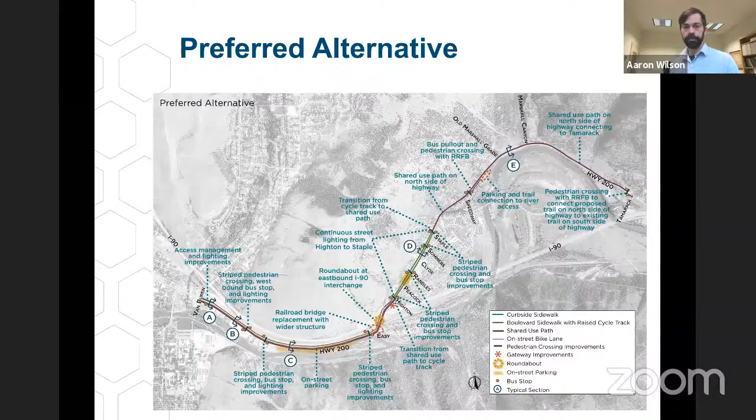So we'll start with the East Broadway section. This is an area that already has some existing facilities, including sidewalk and bike lanes. But we really looked at what would be the optimal transportation facilities through here.

There haven't really been any changes to this section since the last time we presented, other than we've added some additional detail on the typical sections to reflect the variable right-of-way width. One of the challenges through here is that the right-of-way can vary, I believe, between 60 and 80 or 100 feet, so we have typical sections that reflect those different right-of-way widths as you move through the corridor.

Other than that, this section has the shared use path as the primary transportation facility for bicycles and pedestrians. We had a lot of discussion at the last TTAC about the inclusion of bike lanes in addition to that shared use path, and that's really to accommodate those primary bike commuters who are coming from East Missoula and may want to just stay on bike lanes, which essentially matches the existing roadway.

The other piece through here that we talk about in the plan is the potential to have a riverfront shared use path. If that becomes a feasible option, we can come back and look at whether we have one along the river and one along the road, and do we prioritize one over the other. But ultimately, we want to have that protected facility on the south side of the road where the majority of the development is occurring.

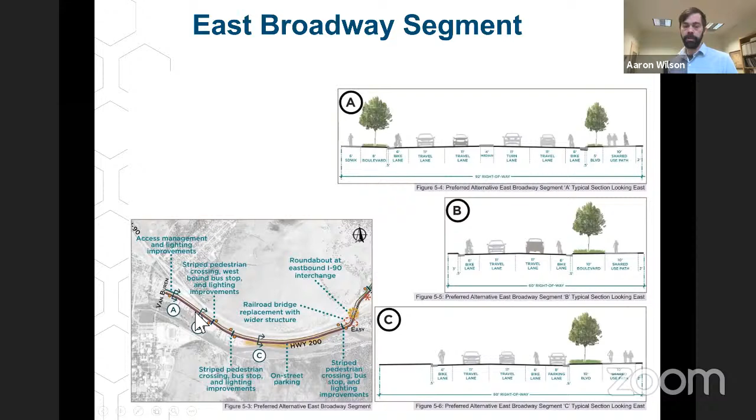The other piece of this is we're looking at the bus stop locations and getting some lighting at locations where we really need it on the corridor, particularly at those bus stops and at potential conflict points like the railroad underbridge and in the core, along from Van Buren through that developed portion of East Broadway.

The other part of this section we wanted to highlight is as it approaches Van Buren, some of the intersection improvements and really thinking about circulation with these commercial areas. As this redevelops, there's some opportunity to create additional access control for safety and improve the efficiency of travel flow through here. Stephen can answer any specific questions about this design, but really we're trying to think about access to these properties, how people are doing that, and making sure we're increasing safety and preventing some of the conflicts that might happen today.

With this particular portion of the project, we'll want to integrate that with any designs that come out of work at the Van Buren Broadway intersection. We'll want to tie in facilities and think about that full intersection traffic flow. But this is sort of the concept for how we could improve this section of the corridor.

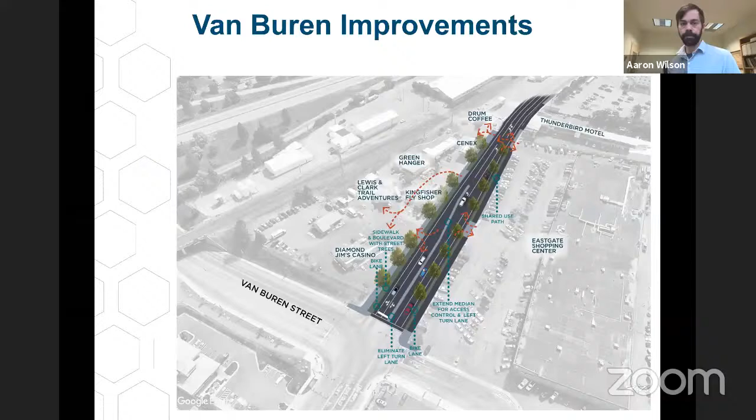Then at the east end of the East Broadway section, we have the railroad bridge. As we talked about, what we heard from just about everybody is that the preferred option is to replace that railroad bridge with something that allows more multimodal facilities through there—widening it to allow bike facilities, vehicle traffic, pedestrian access, and continuing that shared use path under the bridge. That's a really significant part of this corridor plan in terms of the cost and the challenges of getting it done.

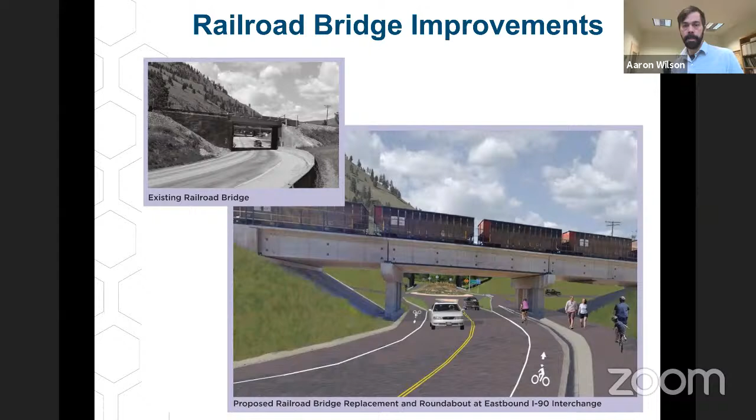So that moves us into the East Missoula segment. This is a much more urban typical section in the design. We haven't made a lot of changes to this design—the concept is still basically the same in terms of having protected cycle tracks and sidewalks.

So having a transition from the shared use path to protected bike lanes as you come into East Missoula, creating a more urban street that has a center turn lane, travel lanes, and where there's right of way and need, potentially adding on-street parking for some of those businesses that may lose their parking access as we develop this corridor. Some businesses are close enough that their parking bleeds into the right of way, so we want to make sure they don't lose that and that we have adequate parking along this section of the highway.

Proposing lighting throughout East Missoula. That's something we've heard over and over from East Missoula residents, that lighting is a real challenge here and creates a real safety problem.

Also proposing to relocate transit stops from Speedway onto Highway 200, with good crossing improvements located at those transit stops to help increase permeability across Highway 200 for pedestrians. There is increasing development on the northwest side of the highway.

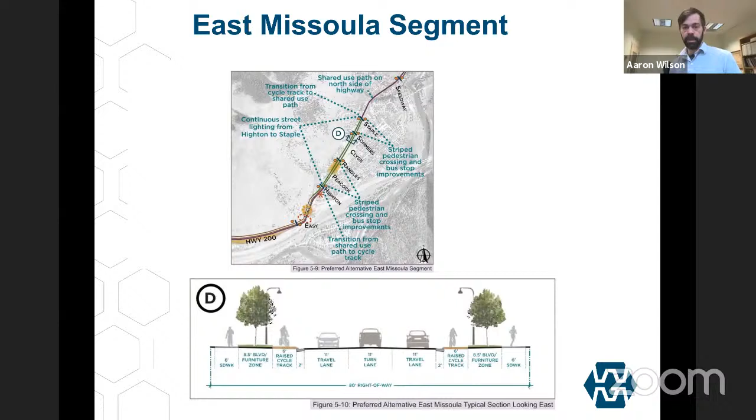So this is a rendering, or conceptual rendering, of what that would look like with the protected bike lane, sidewalk, and boulevard through the core of East Missoula.

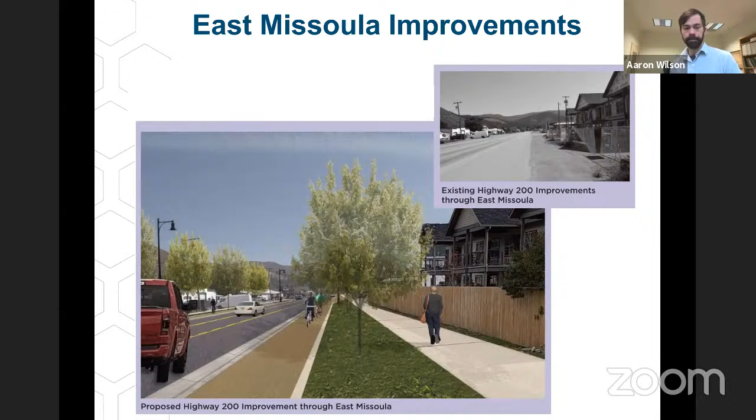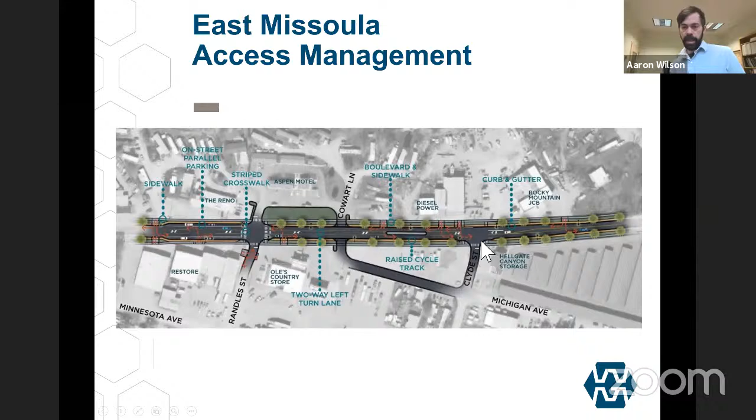The other part of this plan is thinking about access management. Currently it's basically a free-for-all through a lot of East Missoula. There's no curb and gutter, no defined entry into parking lots or streets. A big goal of this project is to better define that, create predictability of where vehicles are entering and exiting the highway, and define those parking lots.

Something we've worked on since the last presentation is how those side streets intersect with Highway 200. Currently they are skewed intersections, which we've heard from both residents and from a safety perspective creates issues. So this plan looked at a couple of different options.

One option is just squaring off those intersections as they hit Highway 200, but because of the angle they're hitting, that creates offset T-intersection geometry, which we think creates additional turning movement conflicts and safety issues. So that may not be the preferred way to do it.

A better approach we think is the right way to square those intersections off is, because of the limited right of way, to shift each roadway slightly east or west and then square it off so they line up. It's not exactly a perfect 90-degree intersection, but it's much closer, and it creates the turn radius and curb lines that will help slow traffic as they're making those turns and make them much more safe.

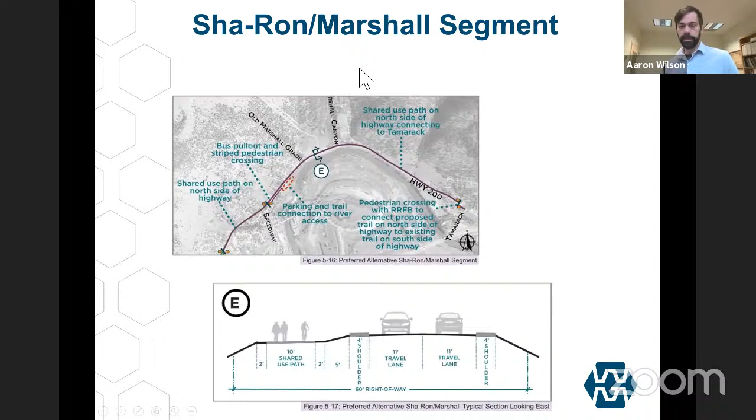So that's the quick overview of the plan. There's a lot more detail in the draft document and in all of the work that went into developing that preferred alternative. But the other piece we've added in this draft is thinking about funding and implementation. This plan gets us to a conceptual design for the corridor, but there are more steps to actually get this project constructed, including finding the funding.

I'll go through the different project elements and what they cost, but it's a substantial project to do this whole corridor from Van Buren to Tamarack. We need to do the engineering and survey and get this project really shovel ready so that when that funding is available, we're ready to go to construction.

So we do have some implementation recommendations and additional information on how we think that could proceed, including breaking this into discrete project elements, knowing that we may not be able to get all of the funding for the whole corridor in one go. So we can be creative in looking for funding for different segments and construct it over time.

So we have this table in the plan that breaks down each of those project elements, has planning level costs associated with it, what's included in that segment, if there are any feasibility constraints or issues, and then goals for what that section is going to provide in terms of improvements to the transportation system.

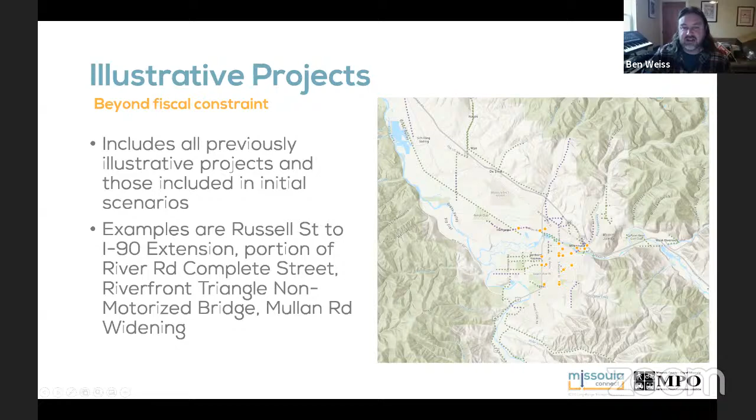I was coming to say the same thing, and I have some specific questions about some of the recommended projects that I'm not able to make much sense of, but maybe we can have those discussions at the next technical advisory committee meeting. I don't know that we need to take the time here, but I'll review the list and make some comments.

I think we'd ask all of you, as you continue to look at the list, to get any specific thoughts or questions on the recommended scenario or the illustrative scenario back to us, hopefully by a week and a half from today, maybe before the 17th. That would be helpful for the next steps conversations. Please reach out if you've got questions about what a project is or if the description doesn't make sense. We can provide more detail.

So Aaron, I've got several hands up. Are you through your presentation? Are you ready for questions, or do you want to continue on? We've got some more to present, but happy to take questions on where we're at right now. Okay, I've got Ellen and Dave Gray. Do you have questions about where we're at in the presentation? I already did mine, thank you.

My only concern with removing illustrative projects is that those went through a public process and were received well, and we can't necessarily just dismiss them. Neil Miner had a good point too — some of those projects, even if they seem completely out of whack now, there may be a funding source in the future. As we move forward through the Mullan area plan, and who knows what will happen with Target Range, we should retain those projects so we don't have to do further long-range plan amendments.